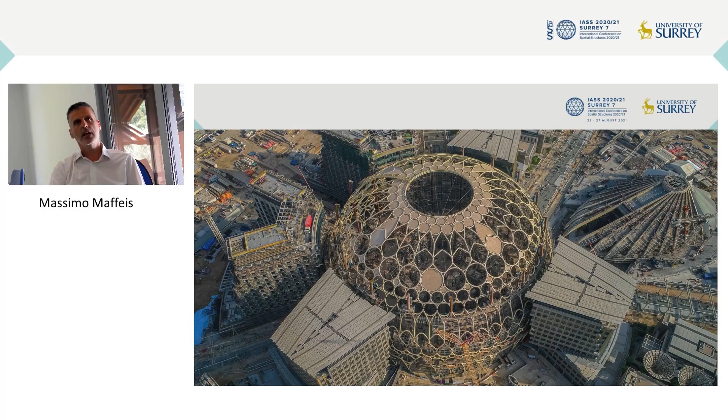This is a picture of the very close inauguration of the Expo 2020 in Dubai. The construction is done by us, it's Al Wasl Plaza. But here is a small history about Maffeis Engineering.

As you mentioned, I started alone in the 2000s after my degree. It's maybe funny to show you a circus tent, one of the most historical fabric structures or canvas structures. I started in this business not because I was looking for that, but it was the occasion.

I was born in a small town, let me say, in Bassano. There were two companies building circus tents all around the world. I started developing, working with one of them, a software for form finding and cutting patterns of circuses. After a few years, we were doing more than 100 circuses a year.

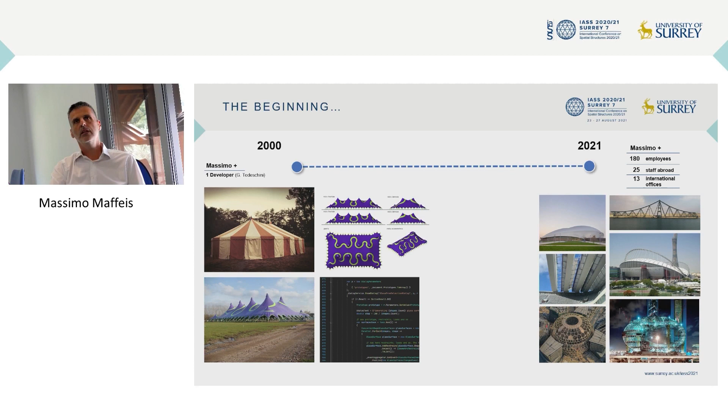Since that time, Maffeis Engineering has grown. We have a team of 180 people based here in Italy. We have 25 staff abroad. We have 13 offices worldwide, starting from Australia till US, Canada, and New York. I mean, we grew a lot.

But more than that, I'm very proud of the team that I was able to build, and especially of the jobs that we were able to achieve. As was mentioned by Mary, we are now very much involved. Our core business is about special structures and fabric structures, cables and stadia, but we've enlarged our presence in facades, bridges, movable structures, and special structures.

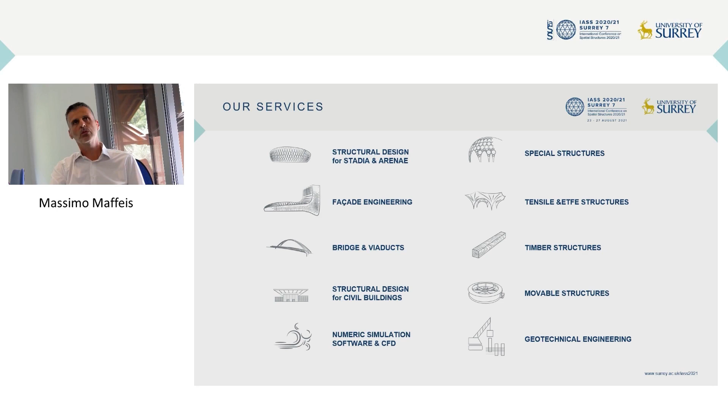We are remaining very close to the developing of the software. In Maffeis Engineering, we are pushing a lot on developing new software for our own use, for form finding, analysis, and FEM, especially for fabric, cable and structures.

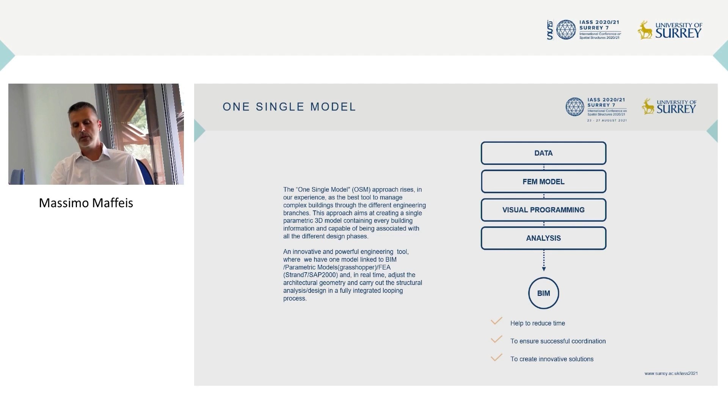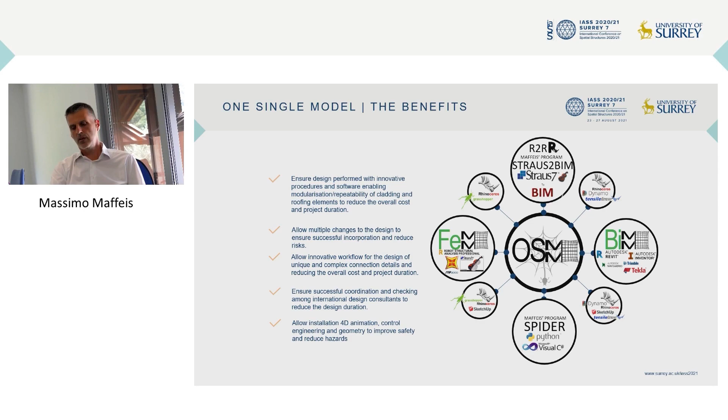We are using parametric software integrated with our system of work that we call OSM, one single model. Everything goes into a central unit that is the core of the software we use day by day in the office, all our people. This one single model became for us the leading path of the day-by-day jobs.

Here we will go through some of the jobs that we developed and were able to build in the past years. Of course, we start with the Qatar World Cup 2022. This is Al Janoub Stadium. In the beginning it was called Al Wakra. The original job was done by Zaha Hadid.

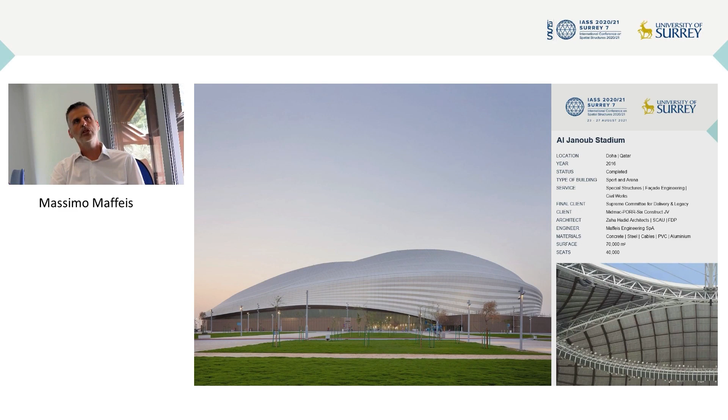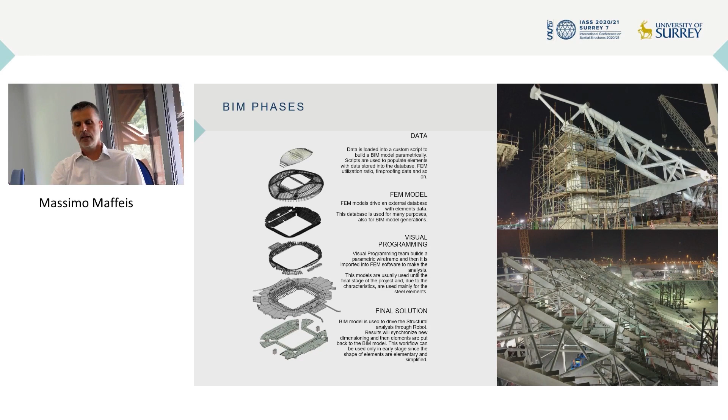Later on, we entered the project as a value engineering proposal. In this project we developed the entire structural calculation, starting from the foundation till the roof and the cladding. Value engineering means there was a project, and we worked together with the construction company for a cost optimization solution.

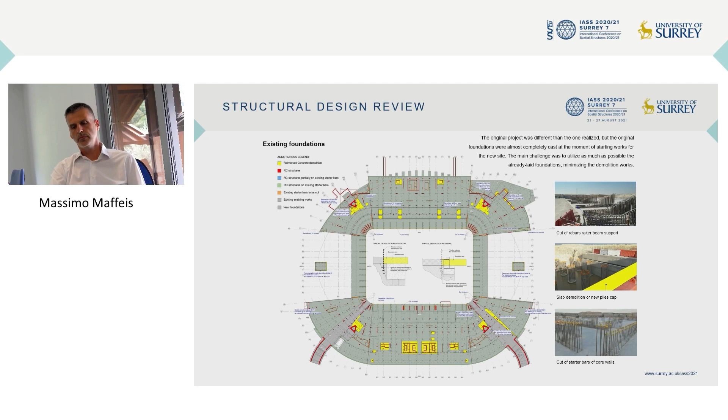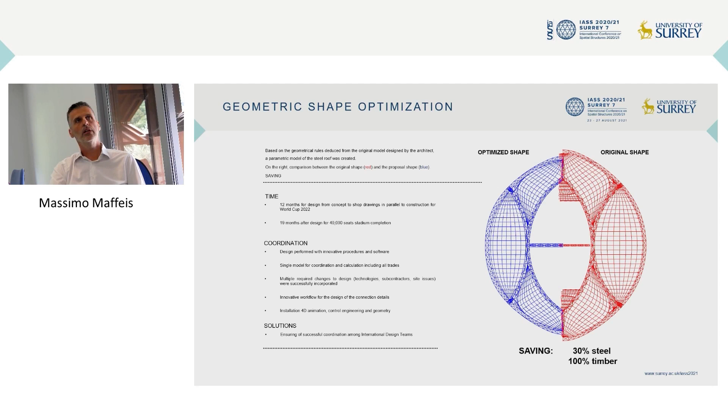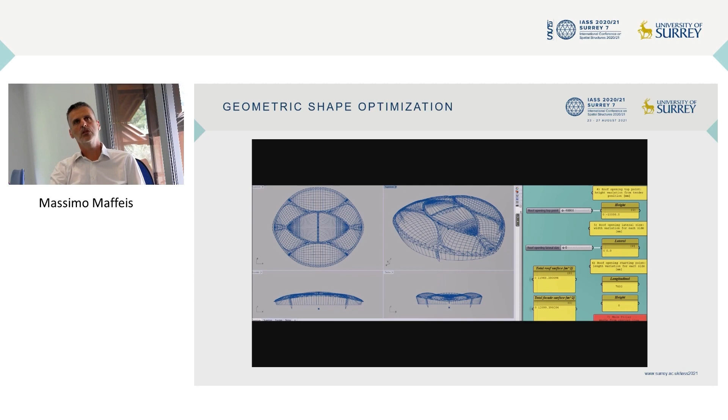Here is some Grasshopper application. It was easy, working with a parametric approach on the project, to see how to optimize the work and the reduction on steel and concrete solutions, in a faster way, already on the BIM software and also on the FEM analysis software.

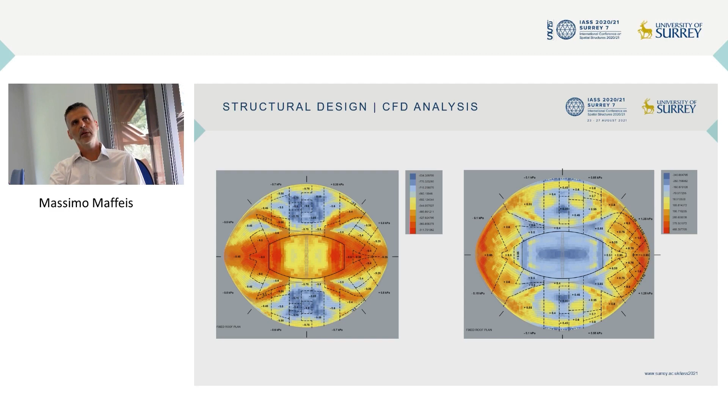Also integrating into our code all the numbers coming from the wind tunnel test or the CFD. Preliminary CFD was done by us internally, we have a team doing such kind of application, and it was later confirmed by the wind tunnel test done afterward.

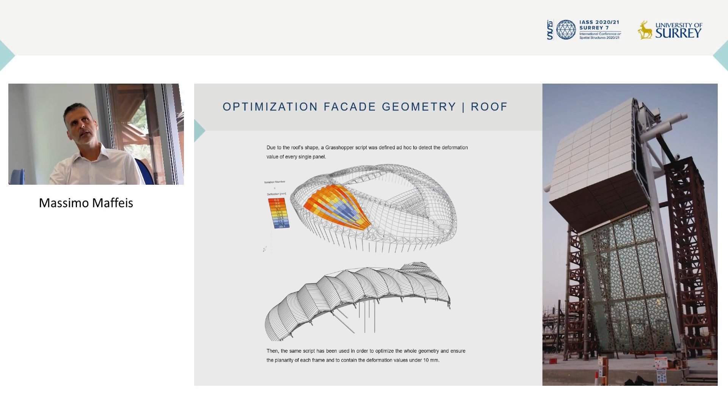You can see also for the cladding, it was studied with optimization tools developed by us. It's a trigonometric structure, but we tried with some tools to optimize to get only planar systems that we can cold bend. That means all the systems were built based on the planar panel and not a 3D curved panel.

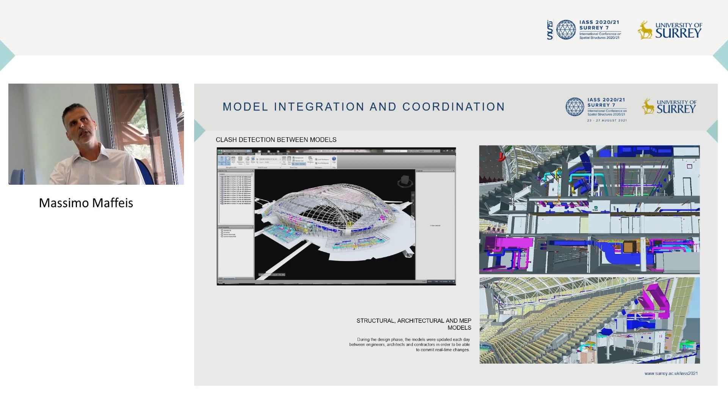All the job was managed in pre-COVID times, but in any case we had a company in Italy, the architect in France, the MEP in Belgium, and all the coordination was done through a BIM platform, in very quick time. It was a really fast-track job that allowed these systems to speed up the work.

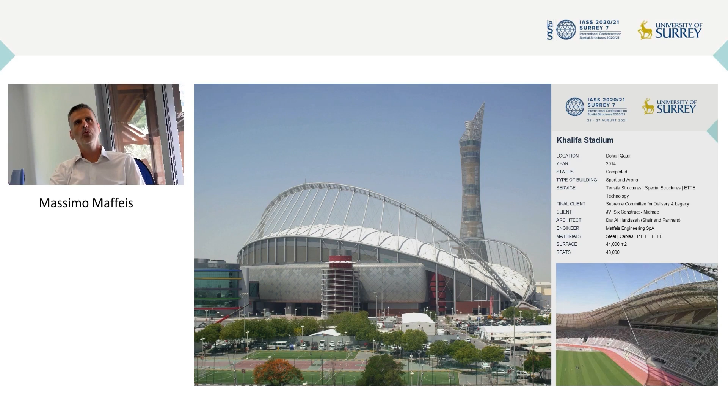This is Khalifa Stadiums, a refurbishment of an existing stadium. It was covered only on one side. We worked on the demolition of the lighting arch, the demolition of the existing roof, the half moon as we call it, and then built the second part covering the left-hand side with a compression-tension ring system.

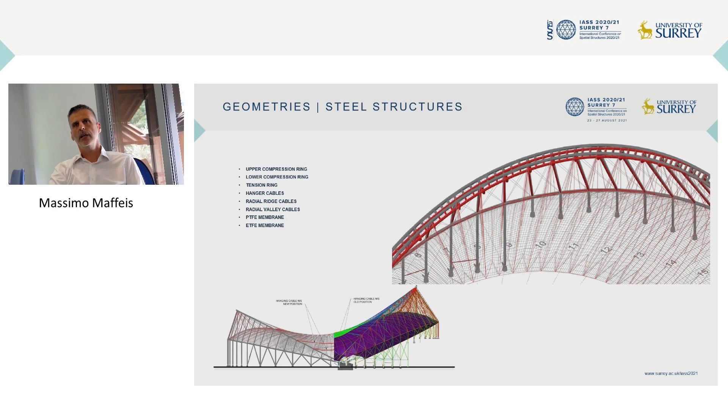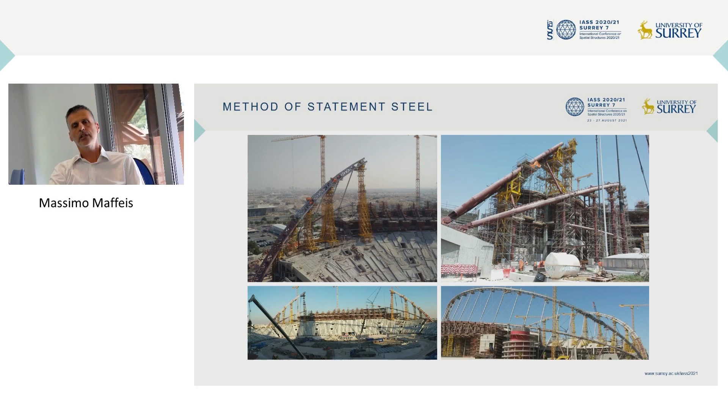We were involved in this project as a designer in the beginning with the architect, and later on we joined the contractors to develop all the construction phase, erection sequence analysis, detailing, engineering, and construction engineering. That means we developed the entire detailing, not only the design but the detailing engineering for construction and all the erection sequence.

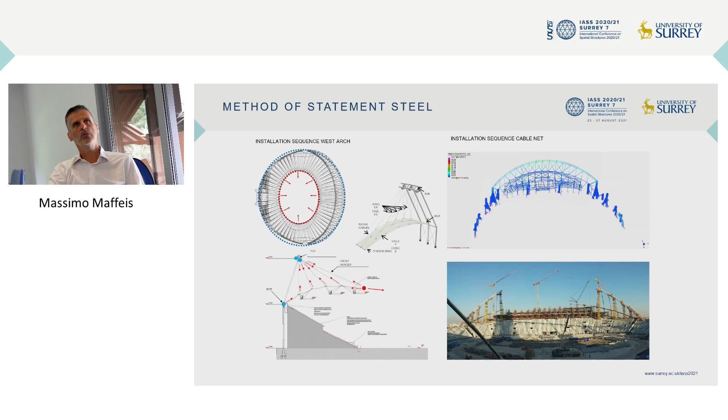You can see here some simulation of the compression ring. The same thing was done for the demolition of the existing part of the stadium, and all the erection sequence for the cable was done by us.

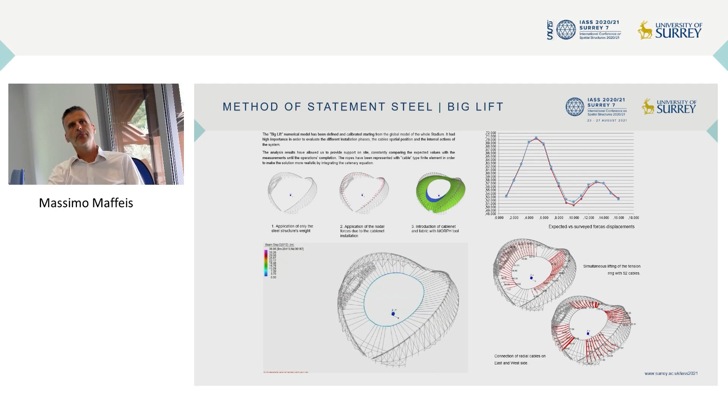That means we followed up also on site, supporting and checking during the erection, matching the numerical model with the site. That is really important, to match the two things.

And we were working on all the details, detailing for the clampings, detailing of the scaffoldings with the cable company and with the erection companies. I mean, we got really site experience.

Speaking from experience, only design without site experience - you can be as good as you wish on the design, but without site experience and the problems you can get during construction, it's not easy to manage a job and also manage a good design.

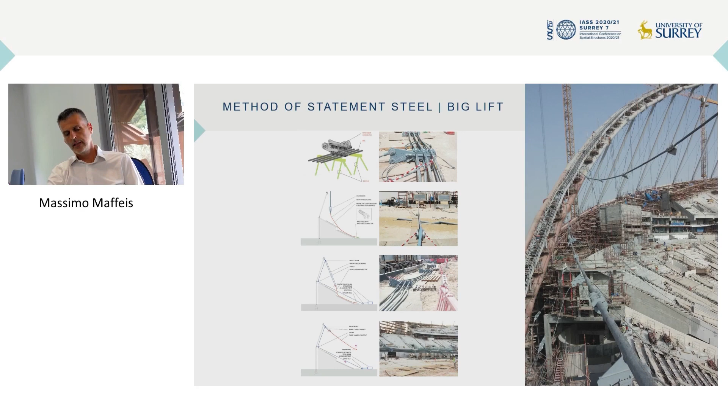This is also the strength that we have in Maffeis Engineering. A lot of our job is related to construction, also erection sequence. That means we really have the experience of the site, which helps us a lot when it's time to do a good design, because you start from day one designing something that is buildable.

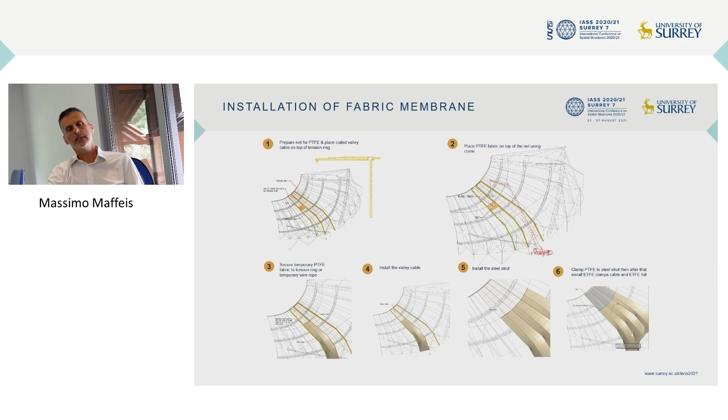Here we were involved also in all the temporary phase. That means the temporary phase related to the fabric was studied by us. In these jobs, we got involved from A to Z, also on the cutting pattern of the fabric, and all monitored and governed by parametric models, what we call single models.

That means from the steel structure modeling to cable erection analysis, this is done with our own tools and software.

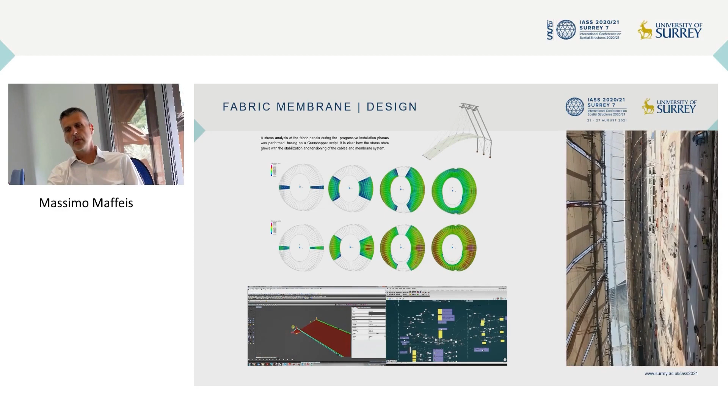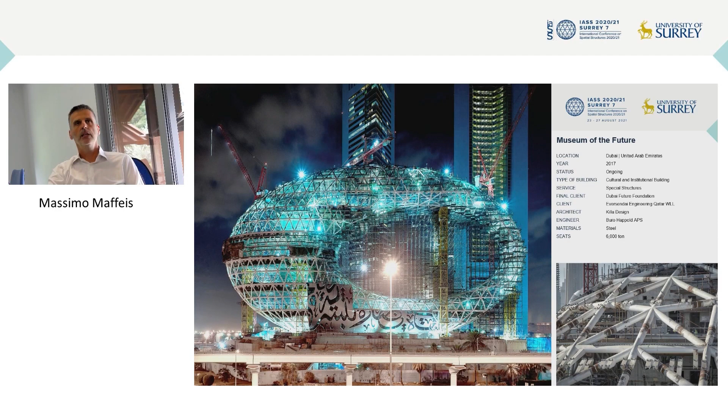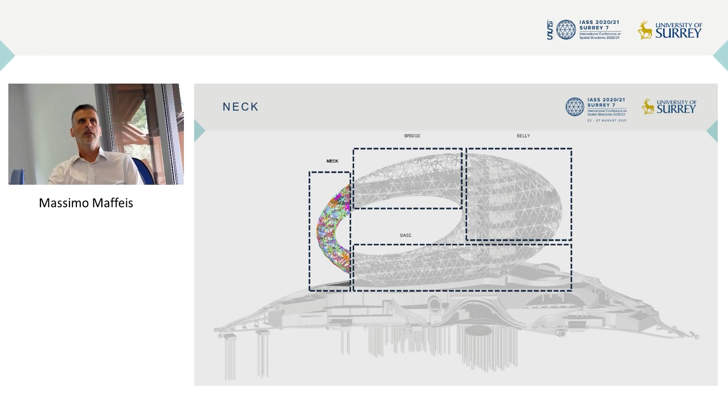This is another job, the Museum of the Future in Dubai, where as Maffeis we were involved for the detailing design of the connections and all the erection sequence. That means we took care of the cladding in this job, of the different parts of the building and the different construction phases of the building.

Taking care of precamber, defining the precamber systems, preset, and the locked-in force generated during construction. Sometimes the locked-in force is really important in the design of the construction, because it can be a real design point for some of the elements that are part of the scope.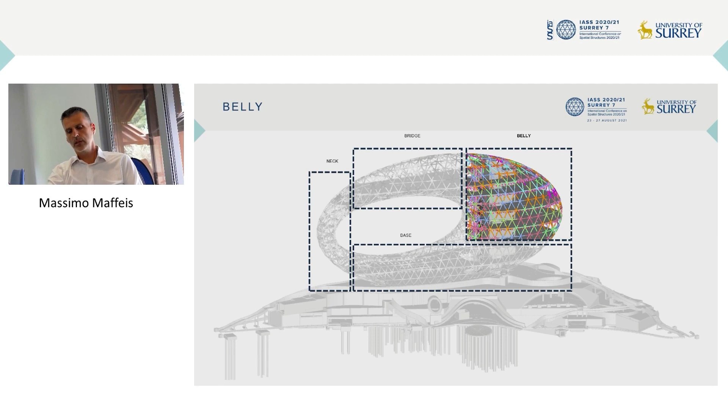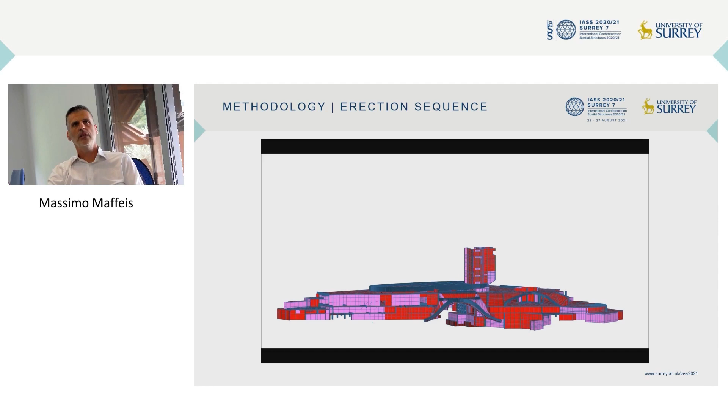You can see here where we start from the basement, which has nothing to do with us. But you can see the models of the construction - it was, I think, 550 or 560 stages of construction considered, just for this stage.

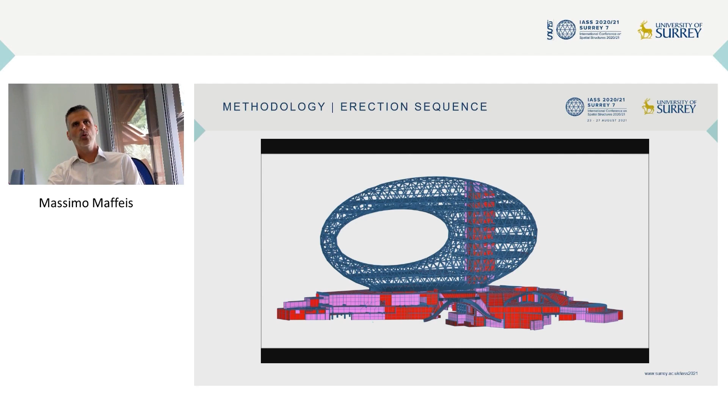Later on we got all the nodes that are all different from each other. That means the temporary scaffolding, supporting, and also when we were out of tolerance, how to manage bringing the structure back, doing the rectification needed to get the structure onto the correct geometry.

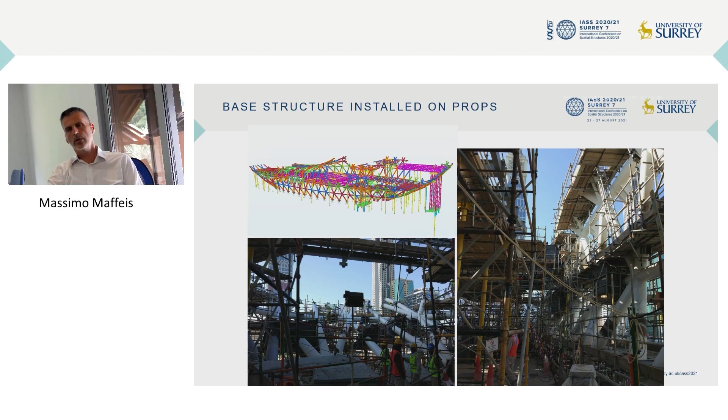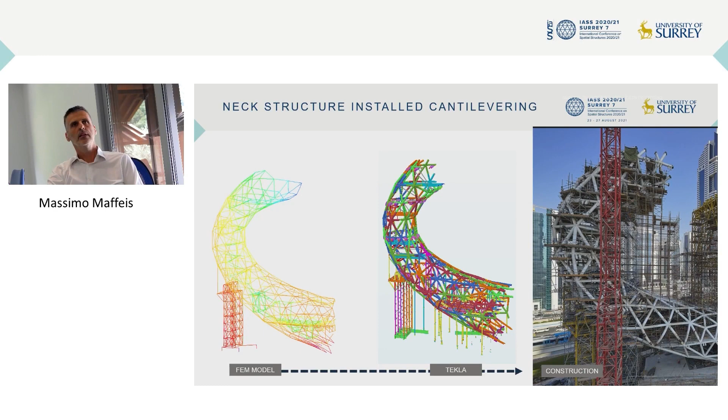Here are some pictures of the construction stage and the analysis about the locked-in force, done from the base FEM analysis till the construction site.

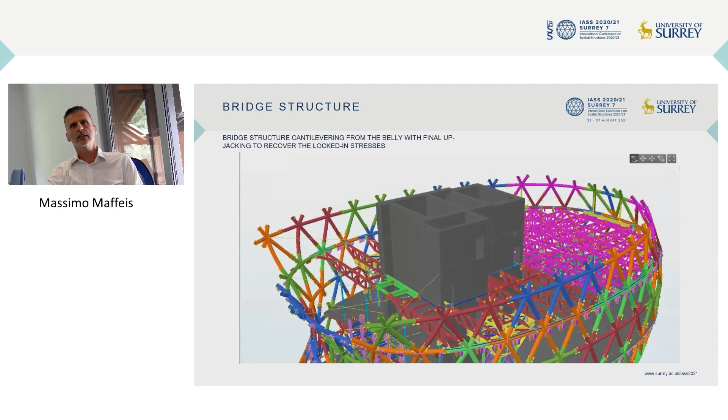Many times we have to realign the construction stage with the constraints of the site, which sometimes we cannot follow. That means we have to be present and ready on site, trying to manage any modification needed to bring the structures back to the original plans.

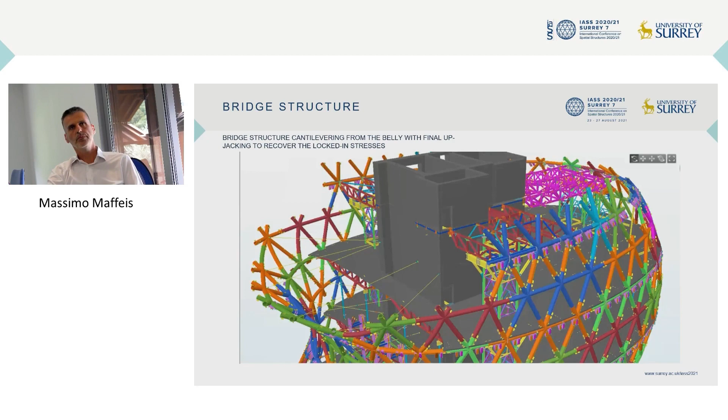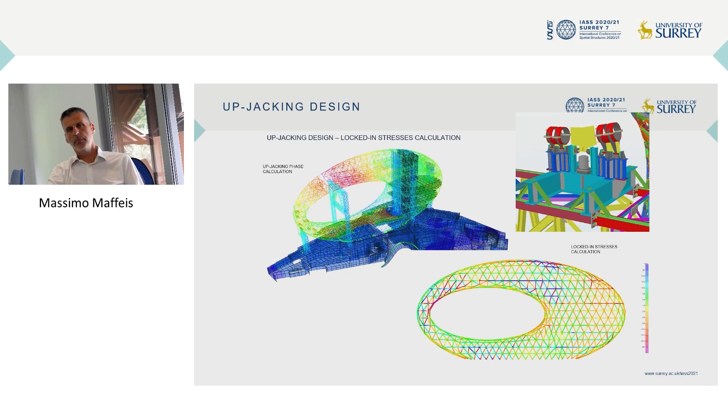Here you can see some of the stage construction with all the coordination on the node. But we also take care of all the mechanisms and devices needed for this operation - cylinders, strand jacking systems. That means we are involved with the contractors on this work too, developing special systems that can be used project by project.

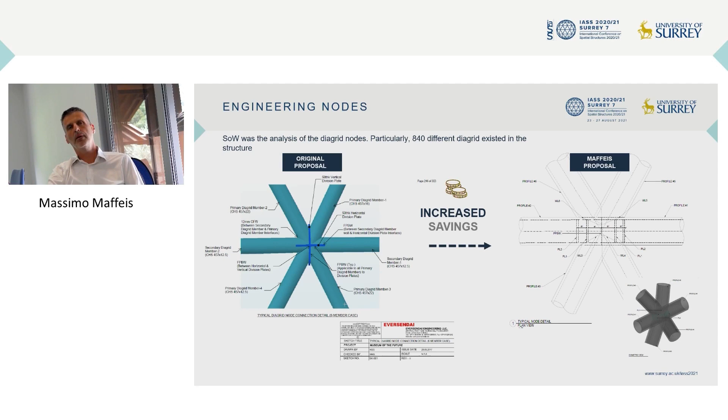Also, the nodes were studied and developed entirely by us. We changed from the original concept, which was a crossing plate passing through, to optimize time and construction with master pipe and slave pipe systems. That means the entire FEM was developed for each node.

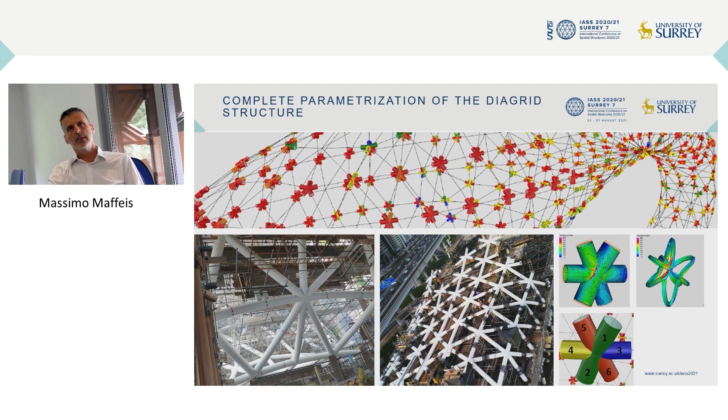840 nodes, if I'm not wrong in the numbers, all different each one, and all the nodes were developed in a parametric way for the application of the load and also for generating the FEM in real time. So you can imagine what it means to have 840 nodes built, modeled by hand. This is all coming from parametric models, bringing the FEM in automatic way, applying the load on the node automatically, and of course double checking the weldings and also the resistance and the locking force.

This is another job we were involved in from day one, from the tender stage, together with Cimolai and Vinci: the new Roland Garros. We were involved in all the steel structure, from the design point of view, and also the retractable roof.

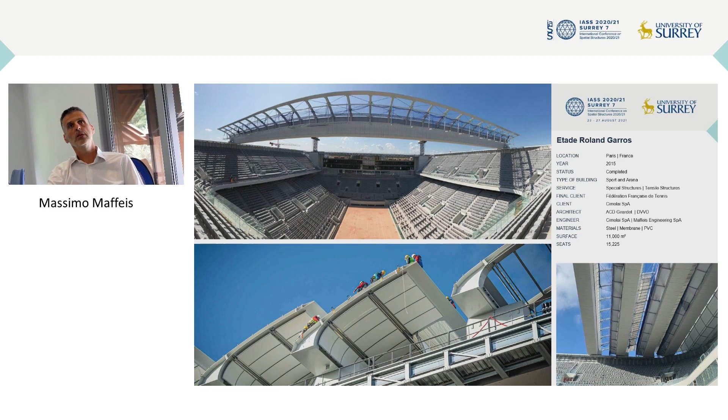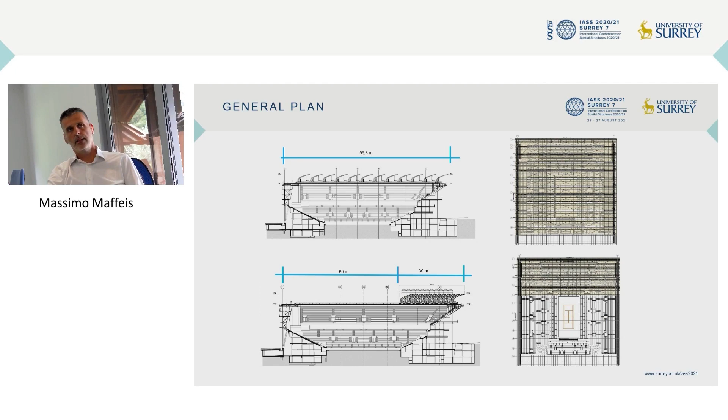Here is some view of the stadiums. We have the beams of the retractable roof. The height is 3 meters, but they span 102 meters. That means we had a lot of interaction to consider with the wind and the vibration of the beams. You can imagine that with 3 meters height and 102 meter span, these are very tiny beams relative to their height.

That means we needed a really significant preset on the beams - if I'm not wrong, more than a meter. That also means the erection sequence, the construction, strand jacking on top, was really complicated. The vibration and the interaction with the wind was one of the key points in the design of this element.

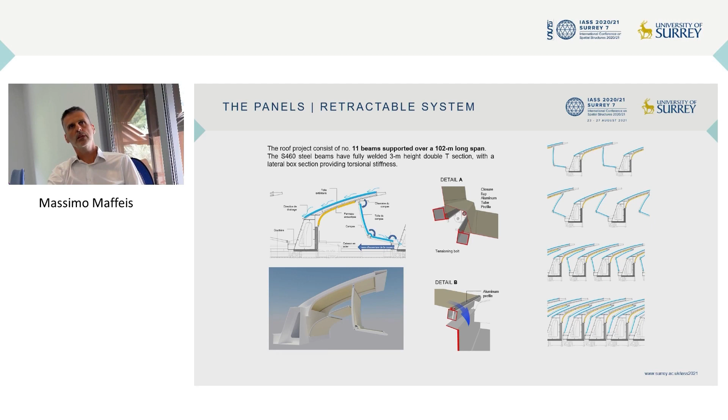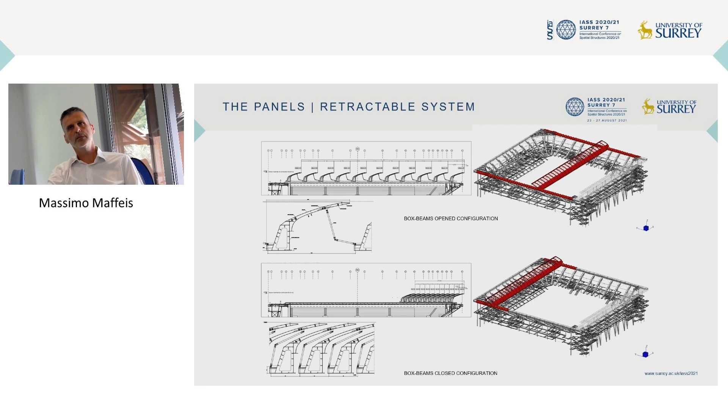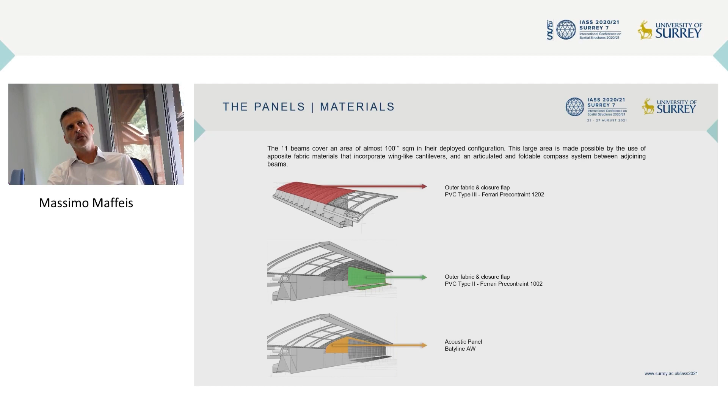It was done also at CSTB in France - dynamic analysis on the models to see the vibration times. And it was verified with a scale 1:1 beam if the vibration times matched the estimation done by FEM.

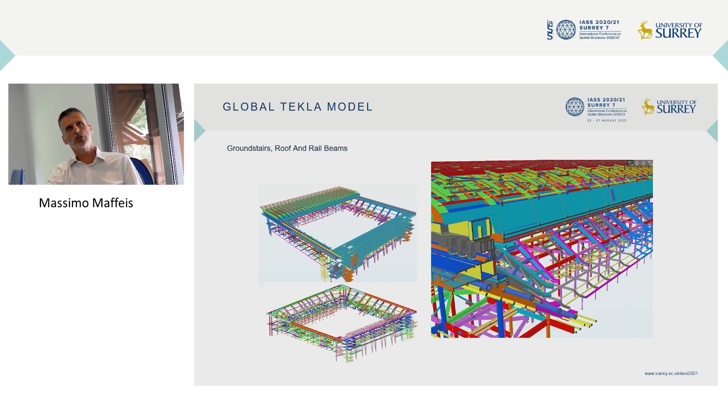Here is some pictures of the construction. Also here we were involved for the full design, and together with the steel contractor Cimolai, developing the construction sequence and looking at the connection and erection phases, looking at the detailing engineering, buckling, and reinforcement on the structures.

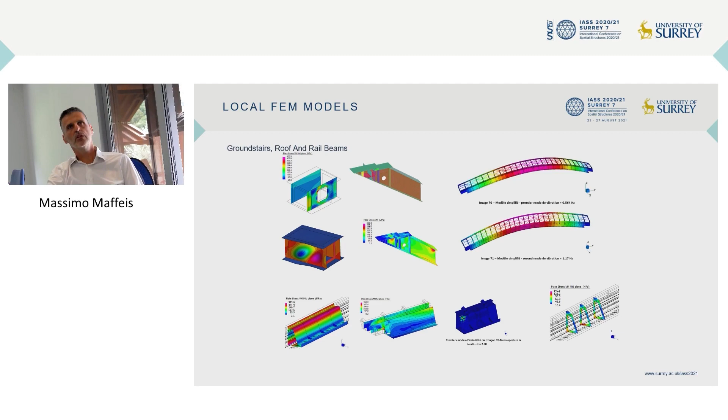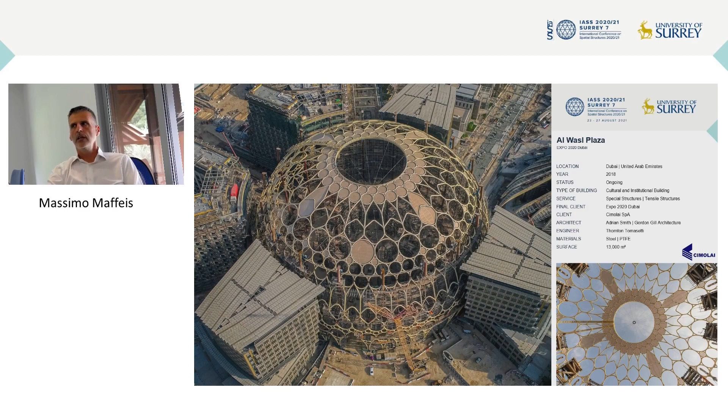This is one of the reference projects. I think Expo 2020 will open in the beginning or middle of October. This is the central dome called Al Wasl Plaza. We were involved in all the erection sequence, connection details, developing the installation regarding steel and also fabric.

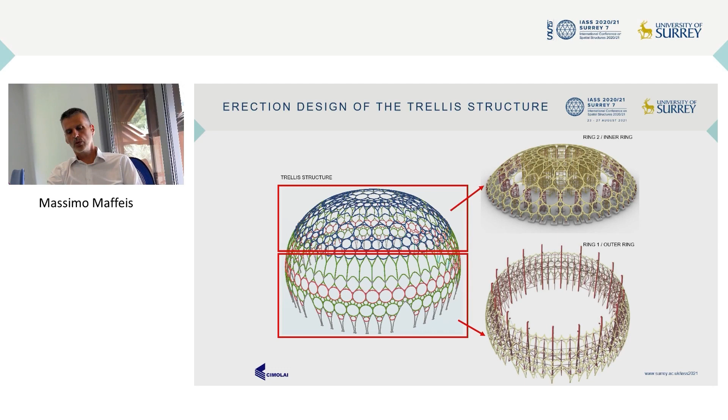The method of installation: part was built on scaffolding, and one big dome, 118 meters, was strand jacked to the top. You can see the posts where the strand jacking was fixed all around. And of course, the key point was the matching of the construction.

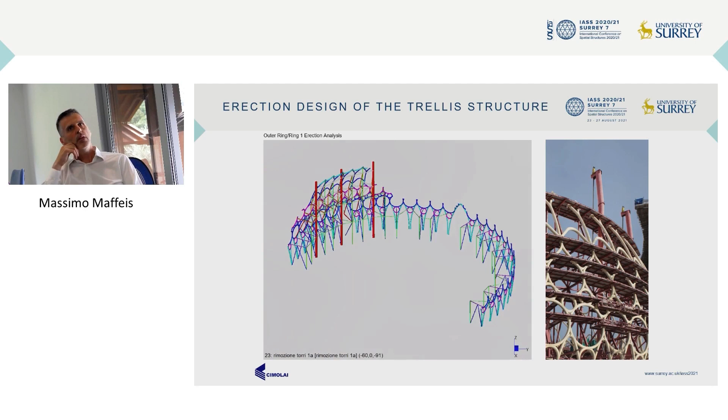Here you can see some sequence of the construction, and this has been checked on site - it was the reference point for the construction on site, also for the preset and for the coordinates, and the locking force of the element during construction. This is all the phases that were followed up on site.

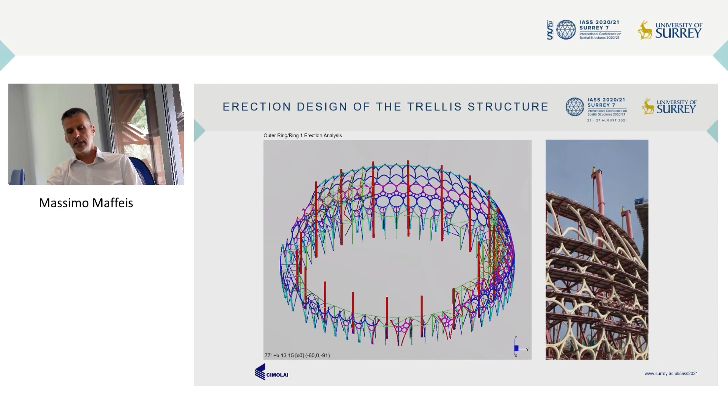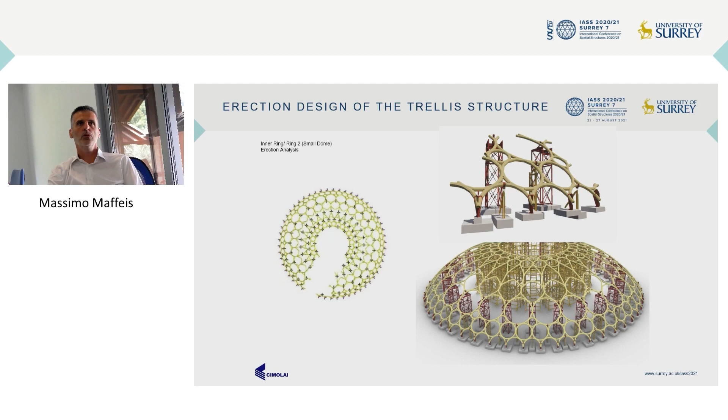And we have the central dome that was built on the ground, with all the reference and the sequence of the construction, and the strand jacking systems with all the sequence and operation on site, until the connection with the lateral structures, until the structure was stable with the closing of the domes.

We also took care of all the fabric and the installation of the fabric on top, with the detailing engineering for this part of the job.

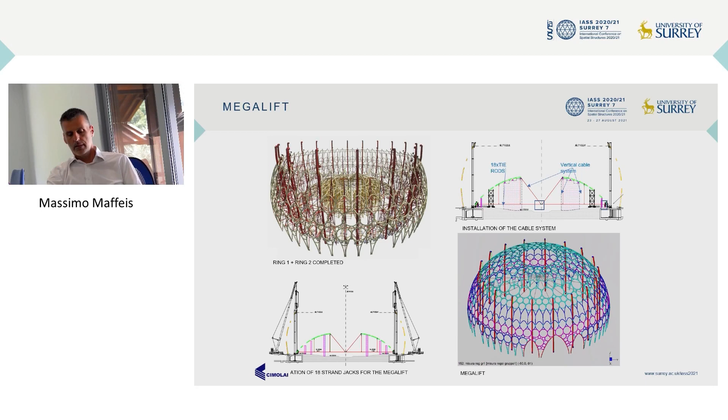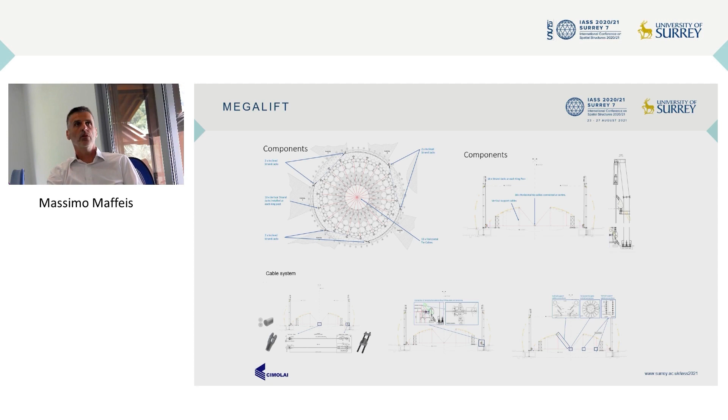Here you can see also some detailing regarding the tools and the devices, which were developed purposely for the projects. You can see some strand jack systems, the application, the anchoring on the ground and on the tops.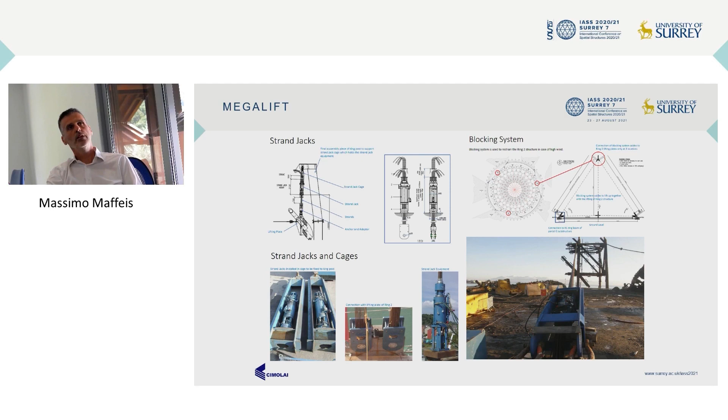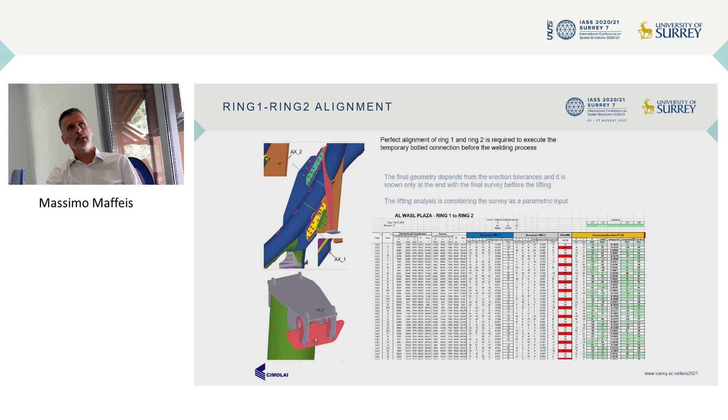Part of the job that is part of the design is also this one - sometimes it's leading the design and has to be taken care of from day one. Here you can see the special detailing for the connection, thinking about how to install and connect, and sometimes this is more critical than the real design of the entire structure.

Here is some points of control between the models and the construction phase. The maximum discrepancy between the design and the construction was 6 millimeters on the nodes. In a structure that is 148 meters wide, I think that's a good tolerance for the design, construction, and erection.